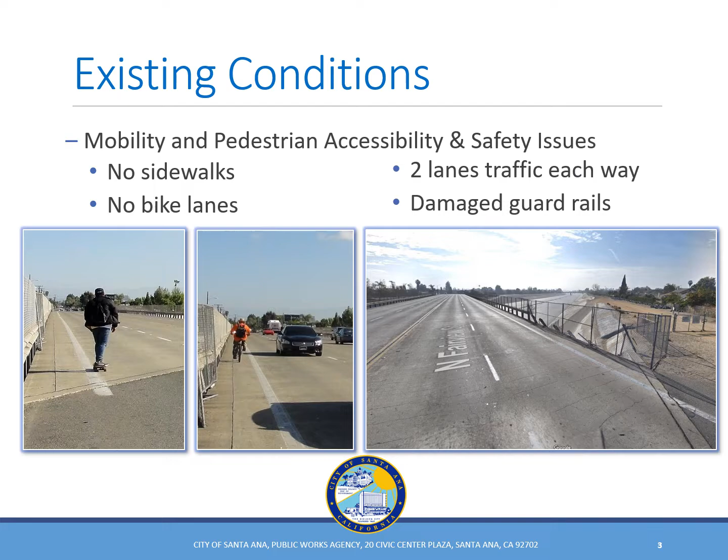The project aims to remedy these deficiencies and improve mobility. Initially, the city only considered replacement of the bridge. However, leveraging federal and local grants, the resultant proposed project was expanded to close the gap in the number of lanes to 9th Street, vastly improving mobility. The proposed project limits extend from 9th Street to 16th Street.

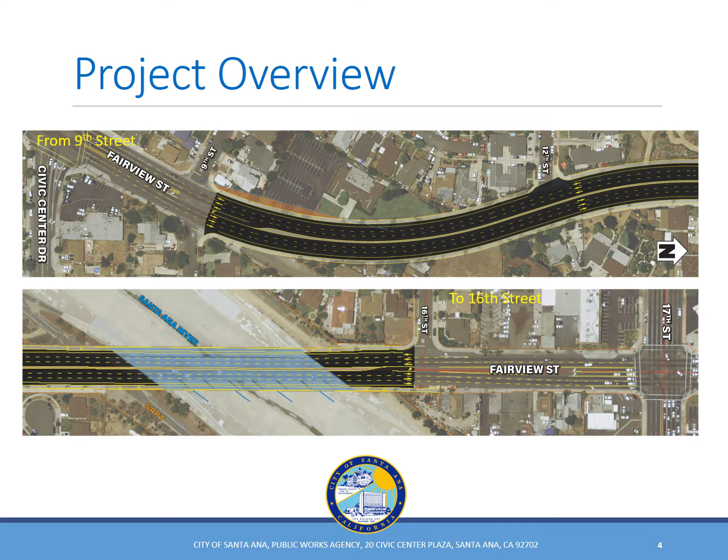The proposed work consists of replacing Fairview Street Bridge with widening in order to accommodate new sidewalk, bike lane, raised median, and 1 additional lane in each direction. The new bridge would include sidewalks connecting to the existing sidewalks on either side of the river, providing continuous pedestrian access. Lighting for pedestrians would be provided on the new bridge. When completed, Fairview Street would have 6 lanes, 3 lanes in each direction, within the entire project limits.

As mentioned on the previous slide, the project's objective is to increase safety for pedestrians and bicyclists on the bridge over the river. This entails replacing the bridge to accommodate 6 traffic lanes, adding 8-foot sidewalks on both sides, and adding pedestrian safety lighting. Other objectives include reducing traffic congestion within the project area, providing bike lanes along both sides of the road, and improving the safety while upgrading aesthetics in the area by adding landscape medians.

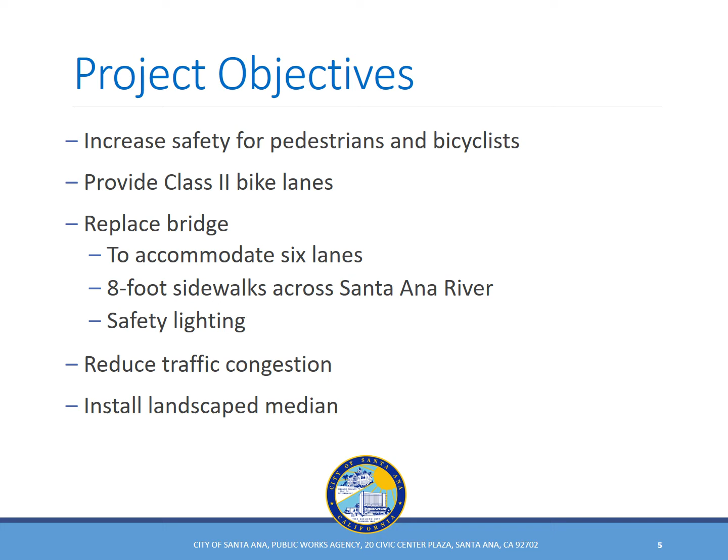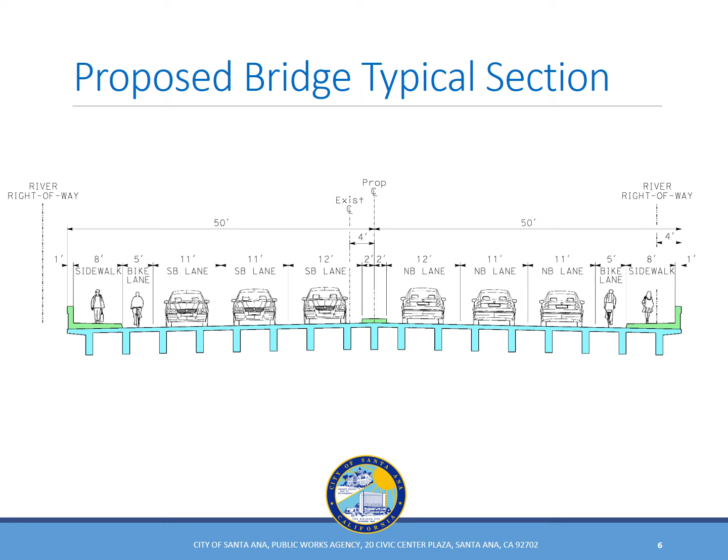The proposed bridge would be 100 feet wide compared to the 52 feet width of the existing bridge and be designed for modern truck loading. The bridge includes 6 lanes, 4-foot raised median for safety, 5-foot bike lanes on both sides, and 8-foot sidewalks on both sides. The bridge barriers would be modern concrete safety barriers. The center line of the bridge would be shifted 4 feet east to accommodate constructing the bridge in 2 stages, which would keep at least 1 lane along Fairview Street open in each direction for cars during construction.

The project has several community benefits. The improvements would provide a safer and more comfortable walking experience with the continuous sidewalks, raised median, and dedicated bike lanes for bicyclists, concrete bridge barriers, brighter area with new lighting, and improved bridge capacity. The proposed project would also provide better accessibility by meeting all ADA requirements for curb and sidewalks. Additionally, the proposed project would remove the 4-lane traffic bottleneck within the segment of Fairview Street, which will improve traffic flow.

Construction of the proposed project would have some impacts within the community. Acquisition of 1 full property and 1 partial property at the corner of 9th Street would be needed to provide safe distances for vehicles turning from 9th Street onto Fairview Street. There would be several temporary impacts during construction. There's possible congestion during the first stage of construction, which would provide 2 southbound lanes and only 1 northbound lane. This is likely to last around 6 months during a single summer. The second stage of construction would occur the following summer and would provide 2 lanes in each direction during construction.

The bike path along the river would be temporarily shut down for a few days or hours at a time and detoured during portions of the construction, such as during bridge demolition and placement of new bridge girders. Other impacts would include construction noise within the project vicinity for the contractor to complete the work. However, during construction, city inspectors will coordinate with the contractor to minimize construction noise level.

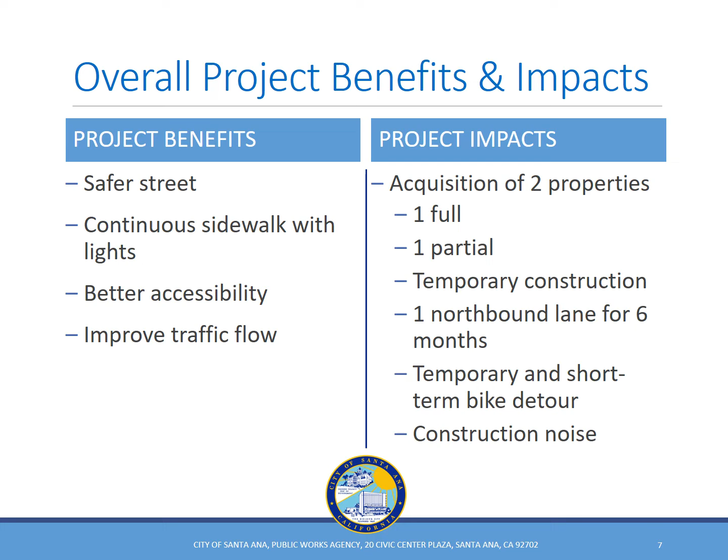The city is the lead agency for compliance with the California Environmental Quality Act, or CEQA. A draft initial study, mitigated negative declaration, has been prepared by the city and was made available for public review on April 6th. A notice of availability, or NOA, to adopt the ISMND was also circulated on April 6th. The ISMND is available for review on the city's website. The public review and comment period will end at 5 p.m. on May 6th. The city will consider all written comments received from the public. The city expects to adopt the final initial study, mitigated negative declaration, at a city council hearing in June.

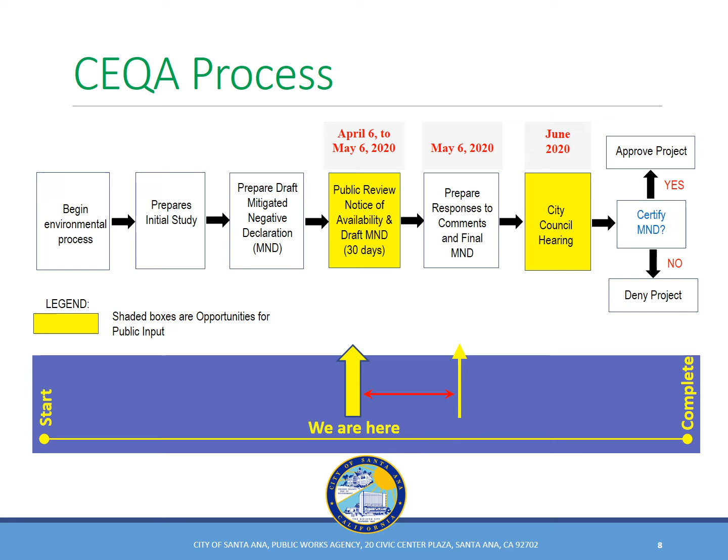The project would result in no impacts to agriculture and forestry resources, land use and planning, mineral resources, tribal cultural resources, and wildfire. The project would result in less than significant impacts to energy, greenhouse gas emissions, population and housing, and recreation. With mitigation, the project would result in less than significant impacts to aesthetics, air quality, biological resources, cultural resources, geology and soils, hazards and hazardous materials, hydrology and water quality, noise, public services, traffic, and utilities and service systems.

Mitigation for aesthetic impacts includes using low light level, energy efficient and directed illumination and pedestrian scale lighting, and adding architectural details to bridge barriers. Mitigation for short-term air quality impacts during construction includes adhering to Green Book standard specifications for public works construction, Caltrans and/or SCAQMD requirements during construction, and utilizing construction equipment that meets Tier 4 emission standards.

Mitigations for biological resources include performing nesting bird surveys, preparing bat eviction procedures or providing proper bat roosting habitat, removing swallow nests in the fall, focusing night lighting only on the directed areas of work, avoiding overspill of bridge lighting, obtaining resource agency permits prior to construction, implementing best management practices during construction, and properly containing and disposing of plants removed or soil disturbed.

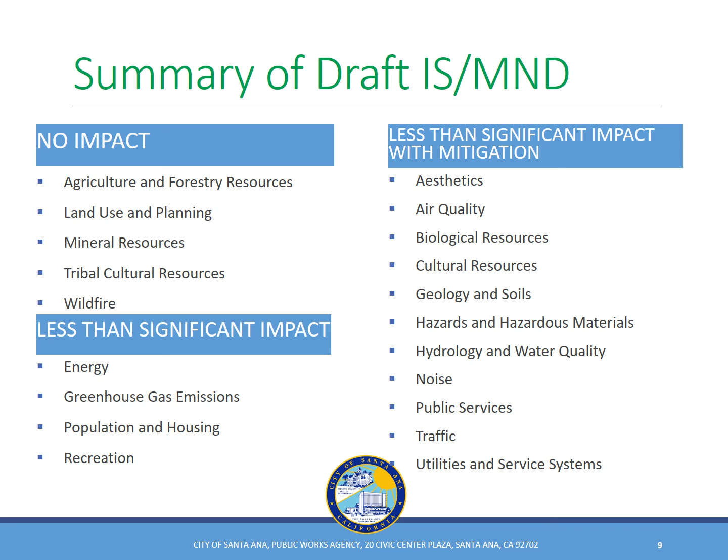The city values the public input, and public outreach is important to us even during this special time. As part of the CEQA process, the notice of availability was mailed to residents within 500 feet of the project limits, which includes more than 400 addresses. The initial study, mitigated negative declaration, and notice of availability were also mailed to several agencies, elected officials, utility companies, and interested parties. The notice of availability was also mailed to neighborhood associations. In addition, the draft initial study mitigated negative declaration is located on the city's website for public review.

The draft initial study mitigated negative declaration is available for public review and comment commencing April 6, 2020. The purpose of the public review and comment period is to afford interested parties the opportunity to provide their input on the adequacy of the environmental document. Written comments will be accepted until 5 p.m. on May 6, 2020. Written comments may be submitted to Kenny Wynn, City of Santa Ana, 20 Civic Center Plaza, M36, Santa Ana, California, 92702, or emailed to fairview@santa-ana.org.

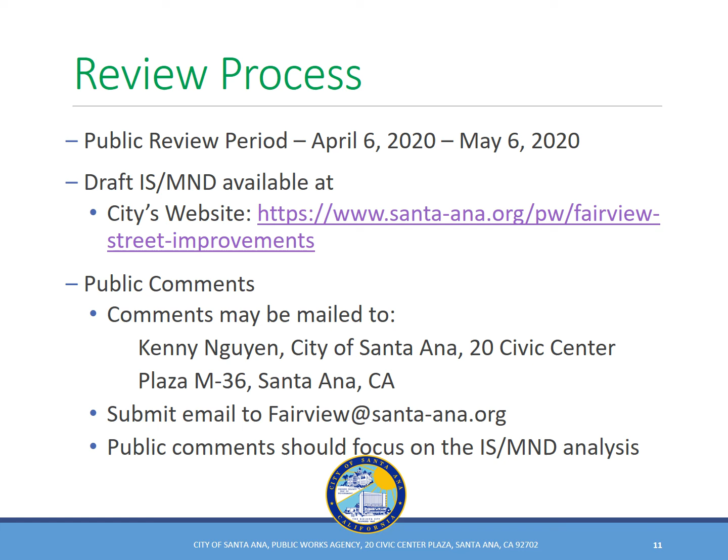After the public review period, the city expects to adopt the final initial study mitigated negative declaration at a city council hearing in June. The adoption of this IS/MND is critical for the city. With the adoption of the environmental clearance document, the city will be authorized to use the allocated construction funding and apply for additional grant funding to cover any shortfall. After City Council approves the environmental document, the project moves on to the design phase where funding has been secured. The city expects to finalize the construction bid package in June of 2021. In addition, the city will apply for right-of-way funding in September 2020 and will begin the property acquisition process in July of 2021 at the earliest. The city plans to apply for construction funding in September 2021 and begin construction in July 2022.

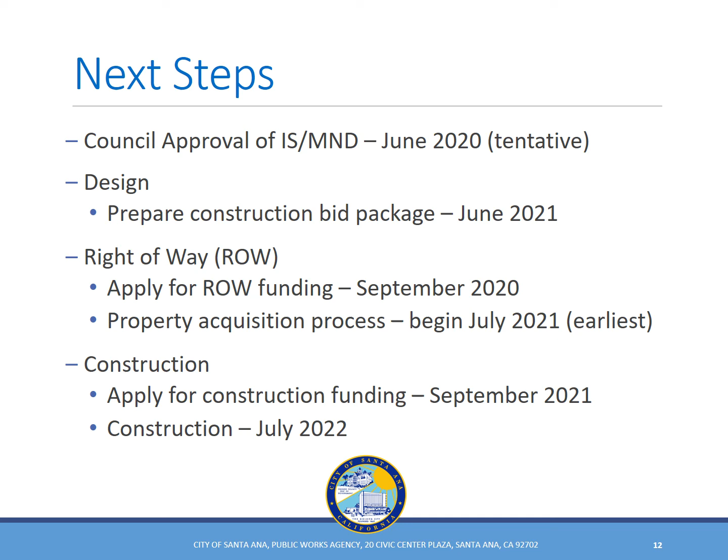The total project cost, including planning, design, right-of-way, and construction, is estimated to be $19 million. The city has secured funding from the Federal Highway Administration, FHWA, in the amount of $14.2 million through the Highway Bridge Replacement and Rehabilitation Program. With the clearance of the environmental document, the city will coordinate with FHWA and its designee to be authorized to use this funding source. The city has also secured $0.2 million from OCTA through their Measure M competitive grants program thus far. The city will apply for the shortfall of $1.6 million this upcoming fall and the remaining $3 million in 2021.